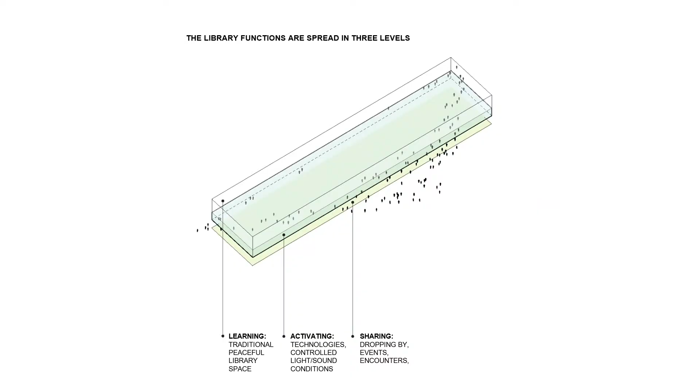An important thing to understand when we go deeper into the building is that it's part of a network. It's not a system in itself. This building has about 100,000 books, which is a small part of the entire collection of about 3 million borrowable books. So the only way to browse the actual collection is online or with a device, and part of the collection floats around in the network of 35 buildings. It's not fixed per building; they move around, and titles that are rarely borrowed are in a storage facility somewhere. But anybody can borrow any of the 3 million titles, and it will be delivered in a couple of days to any of the 35 branches you choose.

So it's not a question of the more books, the better. There is an almost endless amount of books, but they are distributed in a smart way around the city, and also in non-expensive locations for the archive ones. So this is not an archive, this is really an interface for the library network.

The program consisted of about 15,000 square meters, which we realized, according to the zoning, we can fit on 3 floors, and 1/3 of the program was so-called solid space, which we all know what that means, we are architects and students here. So basically rooms with specific functions, and about 2/3 was open space defined more by furniture and non-permanent things. So pretty quickly we realized that we can place the solid part as a thick middle floor, and then start manipulating the shape of that thick middle floor. So then we have an open space underneath it, open space on top of it, and then this interestingly shaped solid that basically defines the building.

When we wrap it in timber, it becomes legible and clear that, okay, the rooms, the specific functions are, and also most of the building technology, ventilation rooms, heating systems, data centers, things like this are inside the timber volume, and then underneath the timber volume, we can create this inviting extension of the public spaces around.

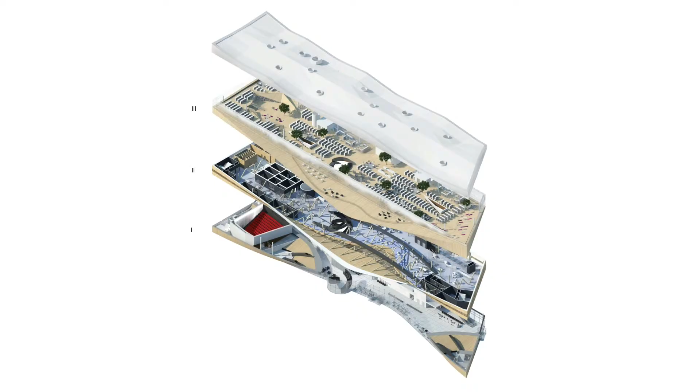For sure. So you can see how the ground floor, really the plaza is empty because it's fucking cold, but then if you go inside, the plaza life exists in there. So eventually we'll find our way inside this timber piece. Here you can see, from the inside, the ground floor, extension of the plaza, then the middle floor, which contains structure, rooms, ventilation plants, ducts, and then on top of the solid, the timber floored open landscape is then the third floor.

So let's look at the ground floor first. We can go inside. Sometimes it's quite empty, like any plaza. Sometimes it's really busy. Sometimes it's just people walking through, but then there are pop-up events. There are different exhibitions. Of course, that's where the librarians first time meet the visitors. But then also people just walk through the building, just see what's new. They can include the ground floor experience of the building in their daily routes.

There's high emphasis on making this slightly complex building easy to navigate for everybody, and of course then we need to generate interesting and exciting ways to get up. As you saw in the diagram, we didn't have any footprint in the 3-level solution to do an actual tall atrium, and we really didn't want to do 4 floors because then we would have 2 middle floors and the concept would be completely different.

So with 3 levels, occupying almost the entire footprint, the elevators are there, but the primary way to go up is this double helix Leonardo da Vinci style staircase, which is quite exciting, and it's a hanging steel structure which hangs from the bridge structure. So the structural engineers had something to actually work on in this project. There are elevators, of course, and then there are escalators going up as well. We really wanted to include escalators to make sure that the upper levels get easy public flows, and utilize this means from commercial architecture to make this non-commercial building very well used and inviting.

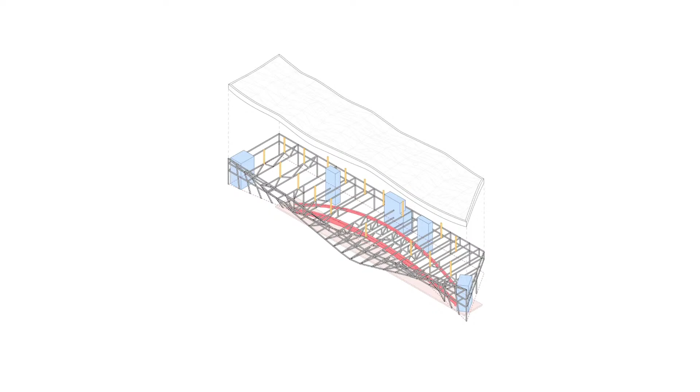Also because the bridge has some vertical movement, you can't even put columns underneath it anymore, that same vertical movement that made the beautiful bridge in the Riva presentation lower down a little bit, so the bus maybe had some. It's a pretty cool story. Same thing actually happened here, so when the bridge was built and then they suspended the huge double staircase there, the whole thing moved down, I think 5 centimeters, but we had no bus clearance issues. We just had to remodel the entire timber facade, but we got paid for that, so that was fine.

There's a lot of structure, a lot of ventilation plants and ducts and so on. So it's kind of permanently non-open space. So it's actually very comfortable to divide. Here's the escalator. Very comfortable to divide this with walls. So when you start with this, it's not like a completely open space, but rather the other side of architecture almost.

If you remember the Rem Koolhaas Biennale argument and this big model of how small a part of the volume is actually the public architectural space, and then there's this mechanical space that's almost more. This is almost a little bit like playing with that, aesthetically at least, and also partially functionally, to allow the people to occupy in a way some of the duct space. You could think of this floor almost like a huge installation floor. Certainly the aesthetics are like that, and there's no cladding to the ducts, which of course provide air also up and down from this level.

You can see the structure. The secondary steel structure holding up the cantilever is clad with timber to make it more touchable and friendly, but it's obviously a steel structure, as you can see from here. And then there are these steps that are the other side of the facade curve. The facade kind of eats into the floor, so we just covered it with steps to allow people to sit on them. This is form not really following function, but something completely different. But then people started to find these places, and this has become a very popular, interesting space.

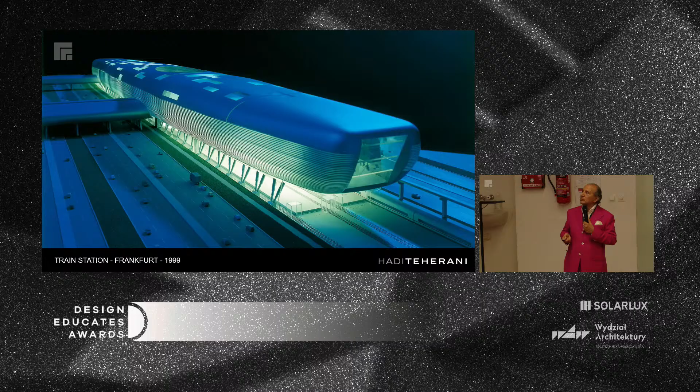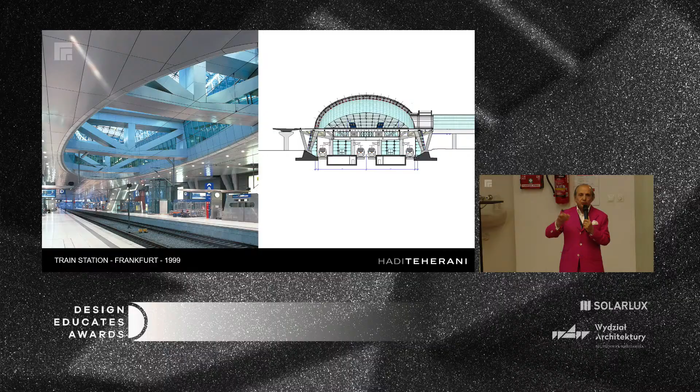The design brief from the airport was that when you come out of the train, you have to feel like you are under the plane. It's 60 meters wide, and you cannot feel the heaviness of the construction, because on top there's a building with 8 or 9 stories. The columns are designed looking like telescopes, like antennas, so it makes it feel very light.

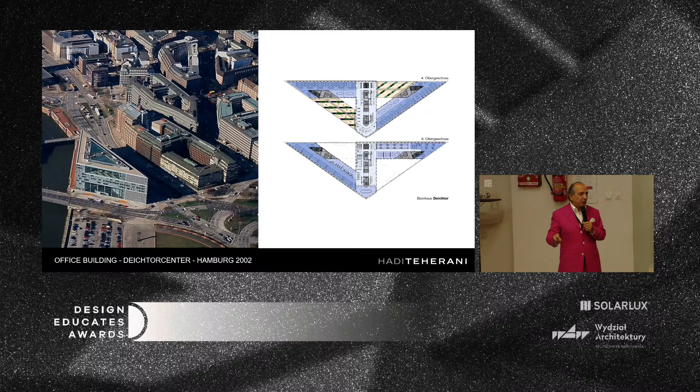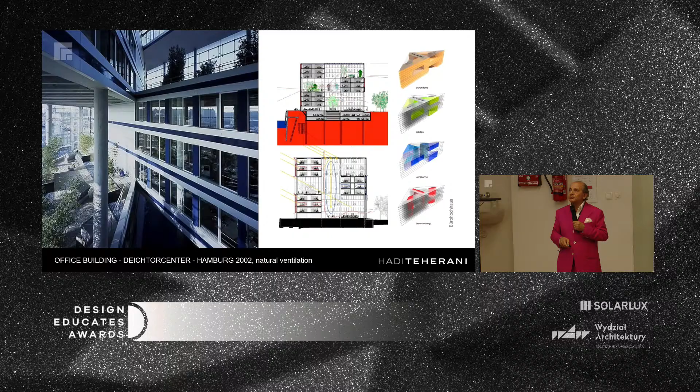Another building in Hamburg, where I had my office for 10 years. It's a house-in-house system, a low-tech building. We control everything only by nature, changing all the air 6 times an hour, replacing the bad air with new air, without any electricity, only with nature. It's working like this. We have piazzas on the levels, and here I started to think about how we work in the future in an office building.

So we started to make product design. That was our office. It was the next building.

This is the Zayed University in Abu Dhabi. We had only 26 months from the first sketch to the opening, for 250,000 square meters, with 7,500 workers. When I was thinking to draw, they built it already.

It's a huge roof, more than 400 meters long, and there's a library. We also did the interior design and some chairs.

When I started to make product design for a chair, it was around 2004. I love the Eames chair, but they produced this chair that's functional and ergonomic, so you can sit on it well. But I thought it looked like something from an insurance company. So I said, we have to make a chair where I can show both the design and the function. And then we designed this chair.

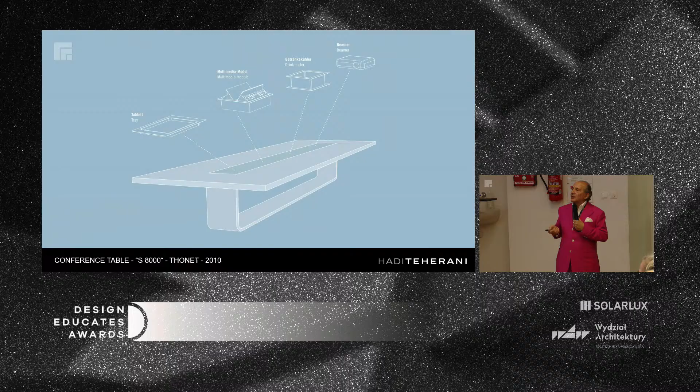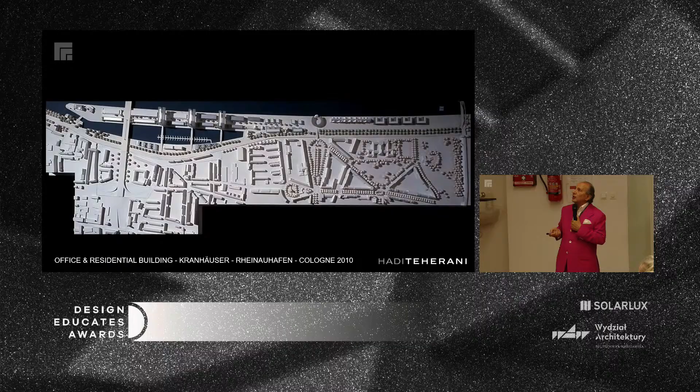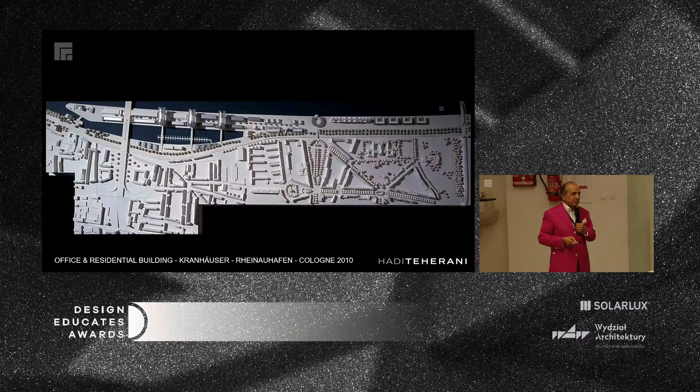Another building in Cologne—this is the Rheinauhafen. When I entered the competition, this was in 1991, and it took 15 years before the city said you can do it. As an architect, you have to get old and stay fresh. From the first sketch to the building was 20 years in the end.

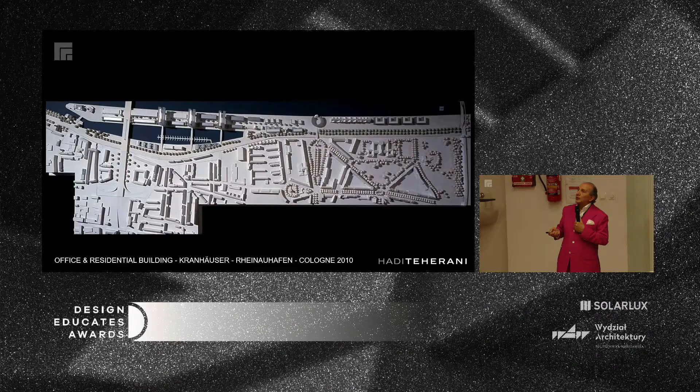We built this because the harbor moved out of this place, giving it back to the city for living, culture, and working. There wasn't enough space, so I built in the air, like a crane. This crane shows a little bit of what happened there before.

At the top there lives the football player Podolski from Poland, in the penthouse. It's one residential and two office buildings. So we have a big cantilever, and this is when you look underneath to the Rhine.

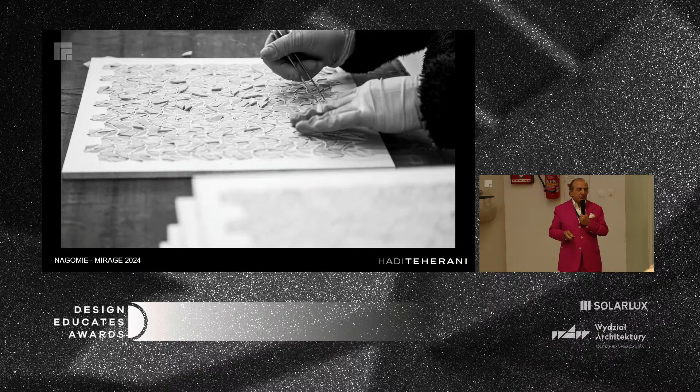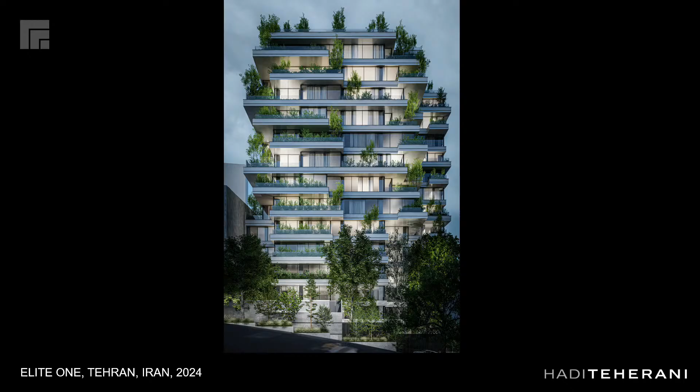There's another building, under construction now in Tehran.

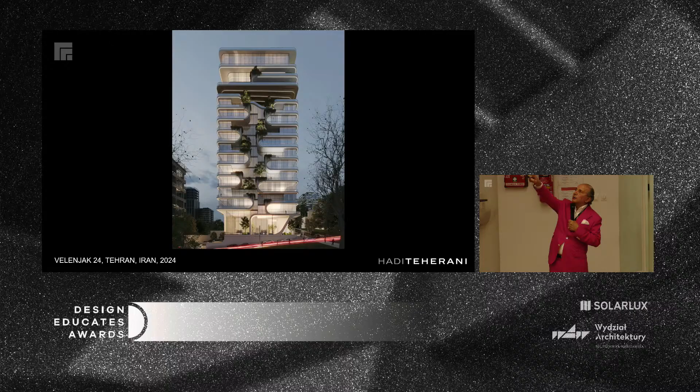Bricks, and we took elements of Iranian culture and put it in the facades.

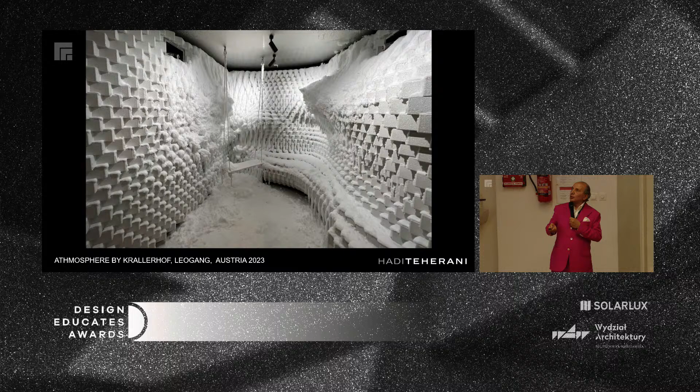Our team - this was the opening with some celebrities. Sylvie, you know her? Yeah.

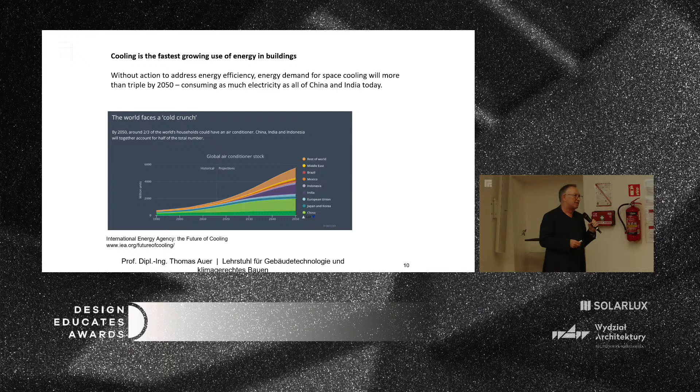That's what we expect. And just recently, the International Energy Agency published that in 2024, worldwide, the energy consumption increased again by 2%. Doesn't sound much, but it was only 1 year, and we want to go down. It's increased again by 2%. And half of it can be dedicated to air conditioning only. So we really need to discuss air conditioning and what it means.

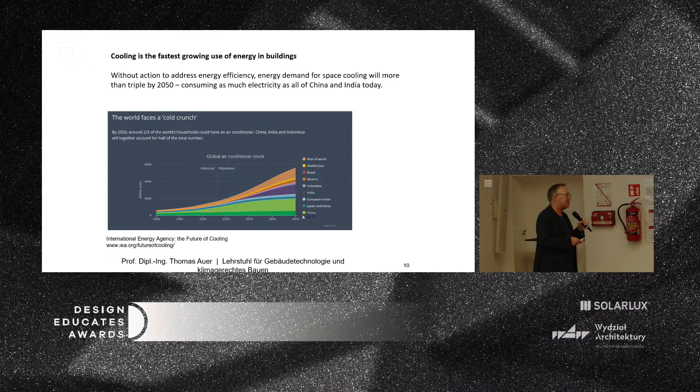And that was the reason why when we got invited this year for doing an installation at the Biennale, and Carlo Ratti asked us to provide an installation that makes climate change tangible, experiential for people when they enter the Arsenale, we said we have to combine this with a message. And the message has to be around air conditioning. So we installed all of these air conditioners, and this entrance hall where we collaborated with a big team is actually indicating the outdoor conditions of Venice in 2100.

On a normal hot day, the predicted climate conditions of Venice will be 42 degrees. And that's what we displayed here, experiencing 42 degrees as you walk through the space. This is an outdoor space, and then you were walking into the next hall, and I have to say, only 12 of these 100 air conditioners we put there were in operation. All others were only making noise.

So we bought on eBay broken air conditioners. So if you need a broken air conditioner, in November we have some of them left over on stock.

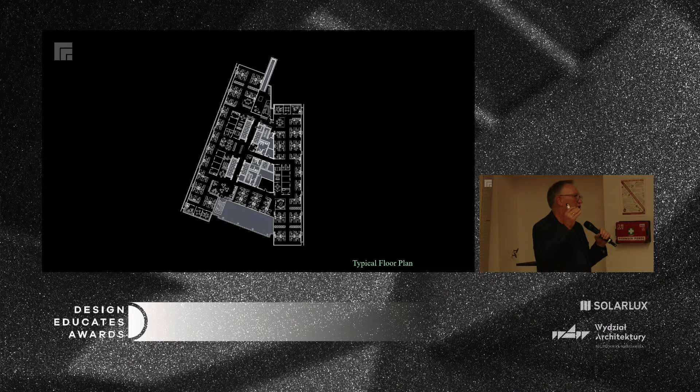In the meantime, we tend to call these spaces mid-door spaces, because we believe that there should be something else than indoor and outdoor. There should be zones of transition. It's something we forgot about. In facade engineering, literally, when we talk about the facade, we talk about the line of defense. So in engineering, we have reduced the facade to a line, whereas traditionally, the facade was always a zone of transition. That's something we completely forgot.

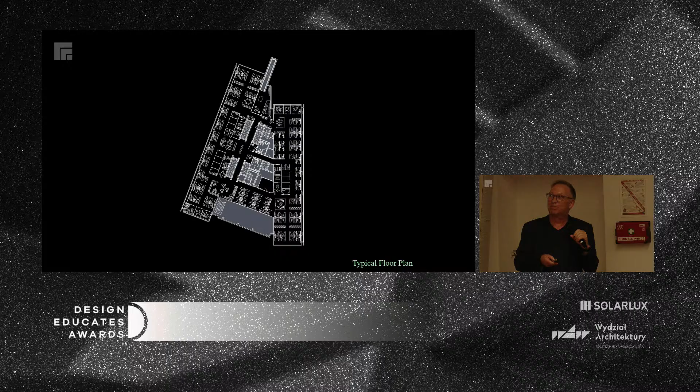And we wanted to integrate it into this building, and then we ended up with a scheme where we have an 18-story tower on a 3-story podium, and we divided the 18-story tower into three 6-story packages, and we have those winter gardens or mid-door zones in each of the 6 stories, and we supply the fresh air into the winter gardens with 10 degrees. We condition those winter gardens to only 10 degrees and let the sun heat up the air.

And then we take the air from the winter gardens, distribute it by a raised floor plenum to the depth of the floor plate. We bring the exhaust air down where we have all the mechanics for the heat recovery, and then we have radiant tubing in the ceiling operated by a geothermal system with almost 300 boreholes going down 120 meters deep under this building. So that's it, and then when we don't need heat recovery, we have the solar chimney driving natural ventilation. We actually measure this building a third of the year without any mechanical system, just with natural ventilation.

This is the winter garden. This is the mechanical room for ventilation for this building. There is no other space for ventilation, and under the benches you see on the right side, there are the mechanical units that provide the air at 10 degrees into the space, and then you see this water curtain at the backside. This water curtain is providing some humidification in winter, and behind the panels on the left side are the units that take the air from the winter garden, heated up by the sun, distributing it by a raised floor plenum into the depth of the floor plate.

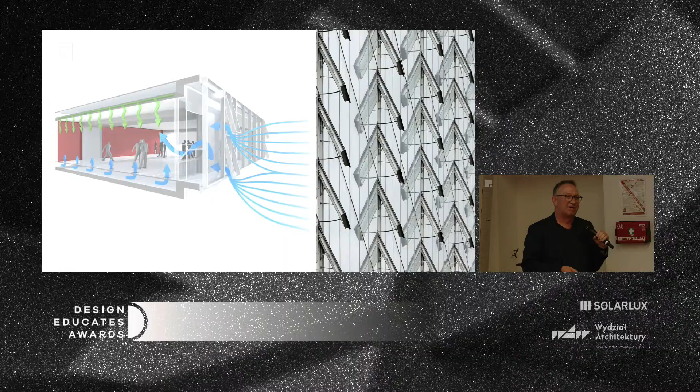And then to the east and to the west, we do have double facades, which was very popular at the time. Bruce Kuwabara, the architect, always said, when you give a public lecture in North America and you talk about double facades, you also double the audience. Because this was the fancy thing from Europe, double facades. And we also ended up with a double facade here.

It has some reasons, we can talk about the building physics, we can talk about that it's just not true that in a thickness of 10 centimeters of a facade, we can mitigate between minus 30 degrees outside and plus 20 degrees inside without getting condensation on cold bridges, etc. It's just not true. I mean, this is what facade engineering makes us believe, but it's not true.

And with the double facade, we could solve those issues, but particularly we could get operable windows and natural ventilation into this building, which we are very proud of. In the meantime, I believe that operable windows and natural ventilation should be a human right.

We should not design any space or any building without operable windows. What does it mean? What was the result? The result was interesting, because we have only radiant heating and cooling. We cool the building to the famous 26 degrees, which is very normal in Europe, very unusual in North America or Singapore or internationally anywhere.

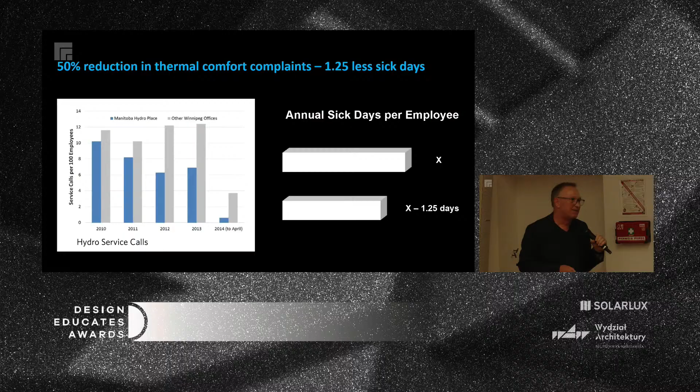And the interesting thing is, if you look at money, there are 2,000 employees working in this building. These 1.25 less sick days times 2,000 employees is worth something like $2 to $3 million. The entire energy savings in this building are worth only $1 million. So you can't use economics to convince a developer of an office building or a commercial building to design a sustainable building. It just doesn't work.

But I wanted to come to the next slide, this was the result. MNECB was the code requirement from Canada when we designed this building, and through our modeling, that's actually what we do, we do computer simulation, we predicted that we can operate this building with 88 kilowatt hours per square meter in a year. That was the result, and we monitored the building over a period of 2 years.

This is not a super fancy high-tech building. We would say compared to North American standards, it's actually a low-tech building, but it took us 2 years to get the building to operate as designed. I mean, the first moment was like a relief. We managed that it works. We got under the magic 88 kilowatt hours per square meter in a year.

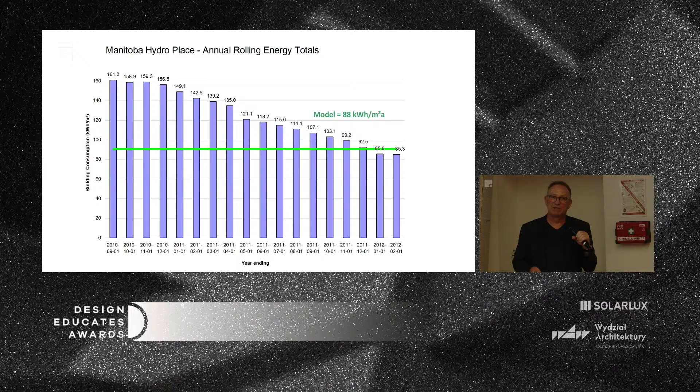I mean, all of Canada and even the US, people were looking at this building. This was highly published even before it was finished. But it took us 2 years, and it was not a single problem. It was like a bucket list of 100 problems. Of 100, I just say a number. I mean, you can't.

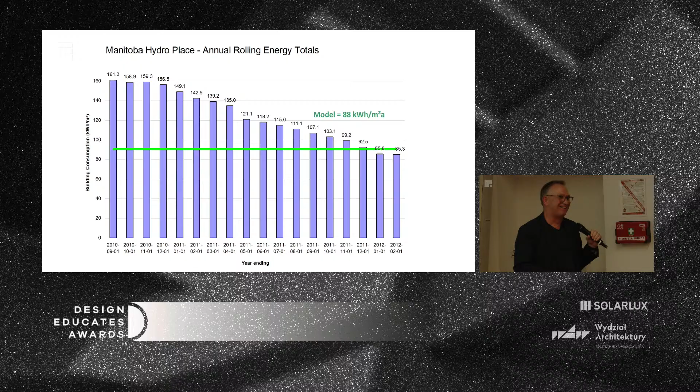So we just accepted that we pay a fortune in construction. We pay a fortune particularly for mechanical systems. We pay a fortune for building controls, and we accept that the majority of the buildings we build do not work as designed. That's the reality. And the question we ask is, how do we get out of this? What can we do? And I think there are only two possibilities.

The one possibility is quality control. And I have no idea where we get the human resources. I mean, what we did here, you can't imagine how much work this is. A building like this has 10,000 data points or more. So you really dig through all the data points manually by hand to find the errors. So how do we do this with all the existing buildings? And the other possibility is to simplify.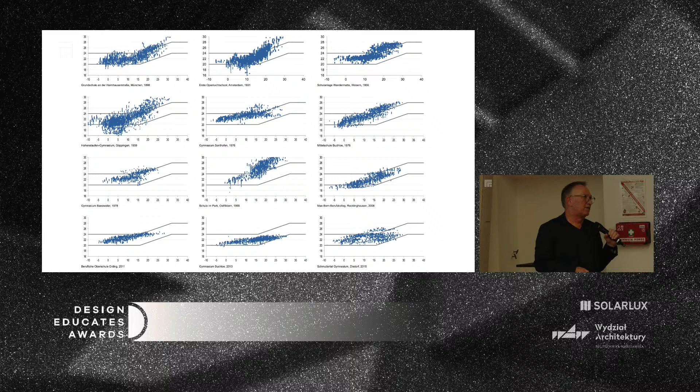We did measurements during occupation time over half a year during summer and winter. We looked at temperature, humidity, CO2, air quality, etc. To make a long story short, this is the Theodor Fischer building in Munich. It has thick brick walls, tall space, exterior as well as interior thick brick walls.

It has no movable shade, nothing. It has a reasonable fenestration ratio. At the end of the day, this building had, among all buildings without mechanical cooling, the best thermal comfort in summer. This building had, among all buildings without mechanical ventilation, the best air quality. And it had the best, most even daylight distribution with the lowest fenestration ratio because of these tall windows, bringing daylight deep into the space.

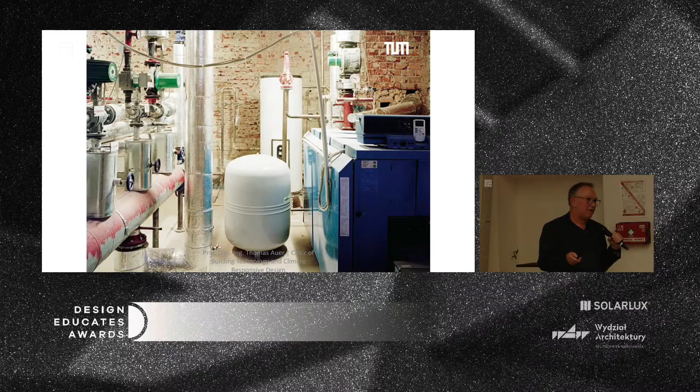So what have we lost? I mean, what did we forget over the past 120 years? And this building was in 120 years not going through a major renovation. This is the mechanical room of this building. It's a boiler room with 30 square meters. Florian Nagler built this monster under his school to provide the highest level of energy efficiency conceivable.

They have a so-called variable volume system where you have in every classroom occupancy sensor and CO2 sensor, providing the ideal amount of fresh air into every space so that you do not waste any energy. The research institute from Munich was going through the monitoring. It took them 3 years to get this monster to operate as designed. And none of us believes that with all these movable parts you need in systems like this, with all these sensors which need to be calibrated every couple of years, who is doing this? The facility manager in a school is not a trained engineer usually.

This guy is sitting in a cockpit. So, I mean, we immediately recognize that it doesn't take 120 years before this system fails. It's not even taking 20 years. It's probably already in 10 years. Who is looking for all these little motors that are operating these flaps, if those operate properly? Nobody does. This is why we measure these performance gaps. And so this cannot be the future. It's just simply impossible.

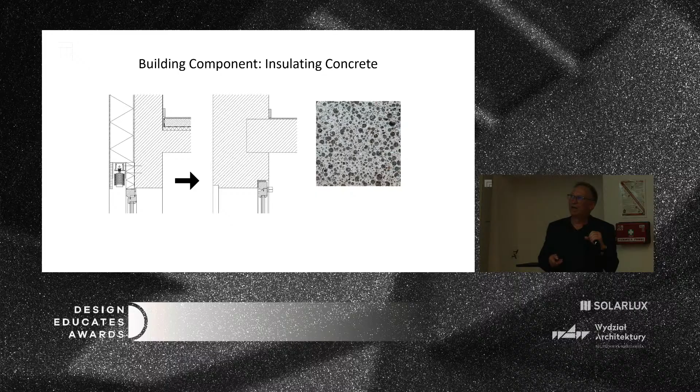So that's why we said we need to separate systems. Everything has to be accessible because everything has different lifetime expectations. We said we don't want to have any composites of material, just pure material, so that they can also later be reused for other buildings, etc.

This was a study we had done at my chair, a parametric study where we looked into different geometries of a 16 square meter room, very simple, different relationships between width and depth, different heights, different fenestration ratios, different orientation, and different glass type.

So we ended up doing 3,000 simulations, and that's what I love about research. We knew the result before, but in research, first of all, you need to have a research result to prove things, otherwise nobody believes you. But in research, you also systematically look into things.

What we did here is basically proving Theodor Fischer right 120 years later. And it was very simple: when we have a taller space with a tall window, we get daylight deeper into the space. If we get daylight deeper into the space with the same daylight quality, we can build deeper spaces. So for the same area, we have less facade surface. If we have less facade surface, we have less heat losses in winter, and less solar heat gains per square meter of floor area in summer. So we get better performance in winter and better performance in summer.

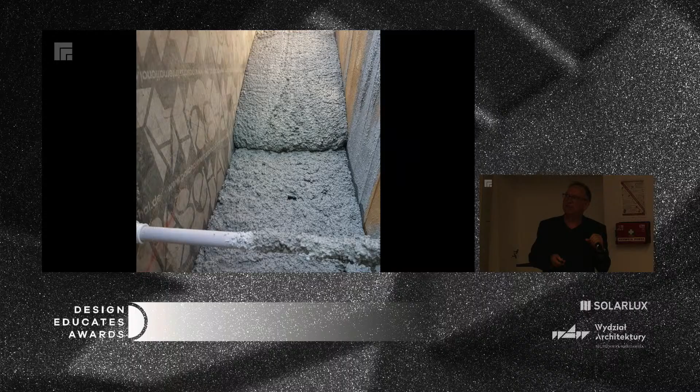Here you see proof of what I say: no reinforcement in this wall when we poured the concrete, and no floating screed either. So everything was taken out that is not absolutely necessary. As a result, you get this exposed installation. You do get a different aesthetic — not everything is super clean and slick, and you do have cardboard on everything. It's just exposed. But if you need another wall plug, you just add it to this layer at the bottom.

This is the inside of the timber building. We have a fenestration ratio, related to the facade area, of less than 20%. We have a 3.10 meter floor-to-ceiling height and still have very good daylight conditions. This is the masonry building, and no shading.

Then 2 PhD students were doing measurements over a period of more than 2 years, and going also through questionnaires and surveys with the people living there. It's ordinary people, not pre-selected people who lived there. We were looking into how do they like it, what do they appreciate and what do they hate. And I tell you, there are quite a few things they really hate.

What was interesting, Florian Nagler always says — we looked into every single apartment, something like 12 apartments in every building — and he said, as the architect, no single apartment had put the furniture into the apartment the way he had envisioned it.

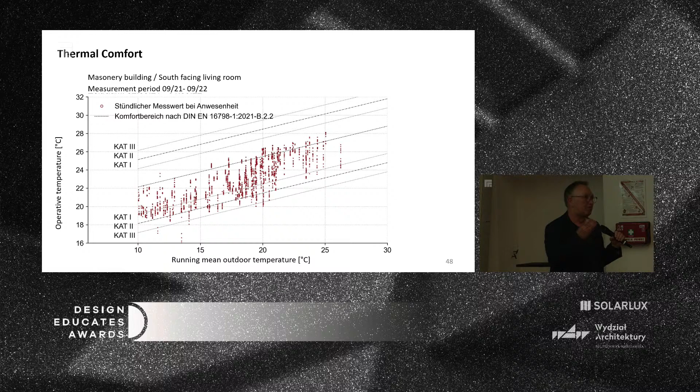We design buildings for people. What was interesting for us is, no air conditioning, no shading devices, no movable parts, nothing. And we achieved better than category 1 in accordance with the European Code on Thermal Comfort, which was quite interesting.

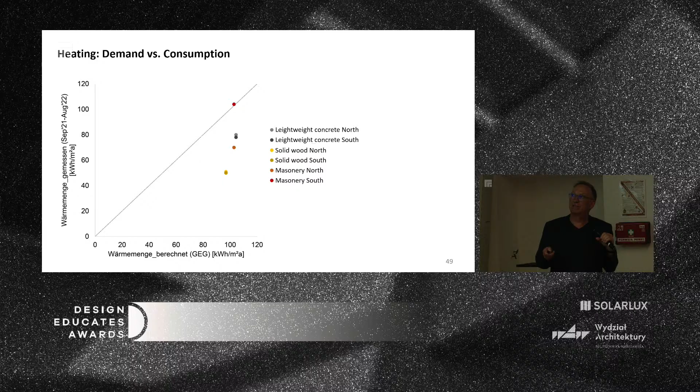When we looked at energy, we do not have any performance gap in these buildings. It's actually the opposite. Except for one apartment, all the apartments used less energy than what we predicted with the German code requirement for predicting energy consumption. So those are the 3 buildings. The question is, what does it tell us, and can we translate this?

These were research buildings, experimental buildings, but how do we translate it to a bigger scale? This is a project where we worked with Transsolar and the architects haascookzemmrich from Stuttgart. It's the headquarters of Alnatura, a supermarket chain for organic food in Germany. They wanted a very sustainable building, and Darmstadt is a pretty hot area, humid in summer.

We said, instead of using air conditioning, we use rammed earth to control climate, to provide passive climate control in this building, and it has to be super low tech. It was very important — there was a very close connection to the CEO, the client, in this building. The client also had the vision that all 500 employees working in this building should work in one room, no partition walls, not for meeting rooms, not for the CEO, for nobody.

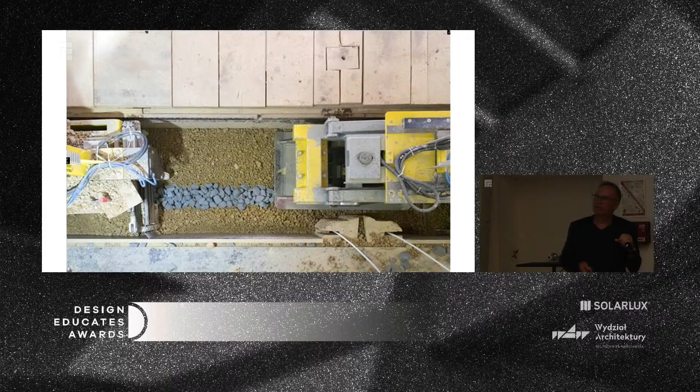This was very important and essential for us, because then we don't need any distribution system, any ductwork — air can just naturally flow through the building. We do have mechanical systems, I don't want to say we don't, but it helped us really simplify.

Then Martin Rauch from Austria came with his machinery. He's behind all the fancy rammed earth buildings you see in Europe — I think all of them were built by Martin Rauch, all the Herzog & de Meuron buildings. So he has the monopoly on rammed earth buildings. He comes with his mechanics on site, and it's basically like a 3D printing process.

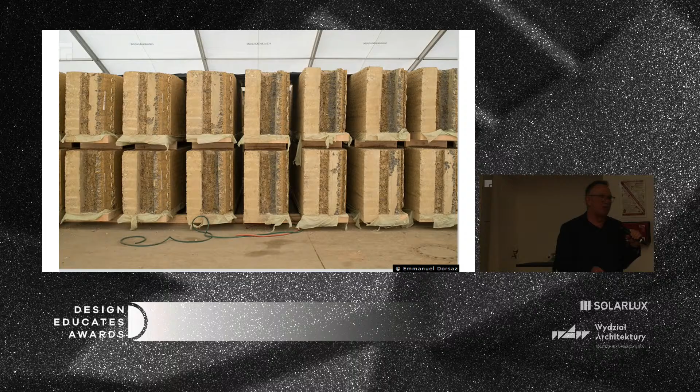He prefabs the wall elements, we put in foam glass gravel for insulation purposes to comply with German code requirements on U value. Then he prefabricated those wall elements, brought them with a cherry picker on site, and assembled them into the superstructure of the building.

We did measurements and published everything — you see everything is open, meeting rooms are just separated with a curtain. We have operable windows, atria to distribute daylight, and solar panels on this south-facing roof structure. This is how the building looks like.

This is one project where we thought we could translate this idea of low-tech on a bigger scale. Another one was with Kaden+Lager Architects, this extension of the university in Witten — it's an all-timber project, also mass timber.

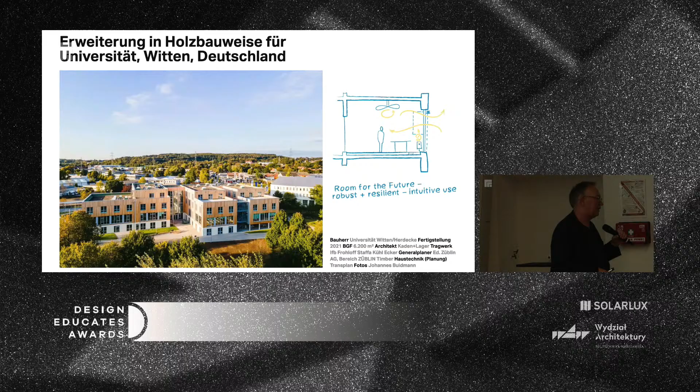The biggest problem we have with mass timber projects, as much as we love the material and know how sustainable it is, is that in summer we get higher indoor temperatures in timber buildings. That's the reality, and the question is how do we deal with it.

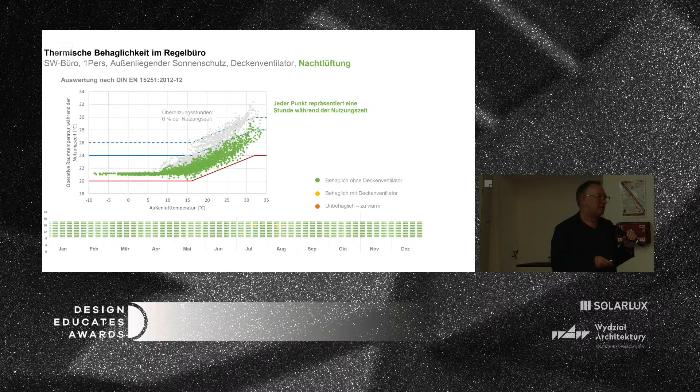In the modeling, we said, what if we add nighttime ventilation? And what if we add a ceiling fan — just a stupid ceiling fan, like it's been used over centuries. Nobody's using this, but in our German code, and I'm pretty sure all over Europe, we can reduce the perceived temperature of people in summer by 2 degrees if we can guarantee air movement — what we call elevated airspeed, which is a ceiling fan. We can correct the indoor temperature by code by 2 degrees.

As a result, we got the temperatures into the desired range, and we ended up with the building just having radiators on the facade. These ceiling fans have a remote control, people can control the velocity as much as they like, and that's it — no mechanical ventilation, no cooling, nothing. It's just a reduced fenestration ratio. These white panels on the ceiling are just acoustical absorption, no heating and cooling. They only have radiators on the facade and those ceiling fans.

I just want to show this to demonstrate that if we relax our comfort expectations — I mean, here I would actually increase it a bit, but just a bit.

If we relax our comfort expectations, then we can significantly reduce the complexity of mechanical systems if we follow some basic rules in architectural design.

Two projects where we had the pleasure to consult: Peter Kutscher and Solarlux with their buildings. This one is at the Bodensee, same ideas, same technology. You see the skylight providing daylight to the center of the building, but it's also like a solar chimney driving natural ventilation, which in combination with the ceiling fan is sufficient to provide comfort for this timber building, even with the knowledge that timber buildings tend to get too warm. We do not need these complex systems.

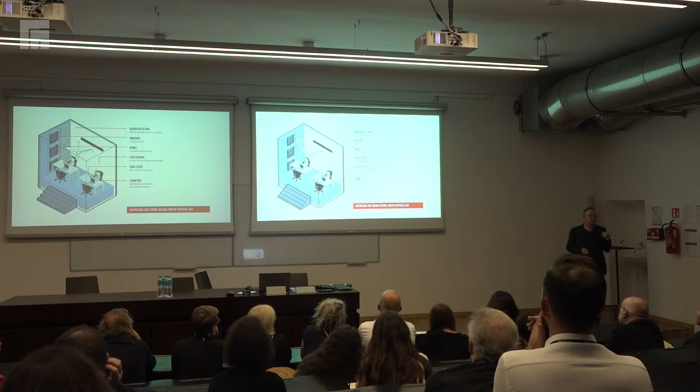And we use biosignals. So we have wristbands that measure the heartbeat rate, that measure the electrical conductivity of the skin, so that we can really see when people get into heat stress. And we let them work for 8 hours a day, 4 hours in the morning, having a lunch break, and then 4 hours in the afternoon. This is how it looks like, and we can provide all conditions we want. Here again, a picture from the inside.

And this was the first result. So what we found in the first result is actually indeed 27, which is the threshold we have by code in hot cities in Germany, not 26, 27. On the left side, you see electrical conductivity of the skin, which is an indicator for heat stress. You see that 27 is still quite okay, but then with 28, heat stress goes up exponentially. So when you see this result, you would say, Fanger, code, everybody is right, okay, check.

But then we looked into how it evolves over the course of the day, and we found that there is a big difference between morning and afternoon. We had people exposed to 30 degrees, and we did not see any heat stress in the morning. But we always saw heat stress in the afternoon, and then we were digging through literature, and it has to do, of course, with burning food, burning lunch, but it also has to do with the circadian body temperature.